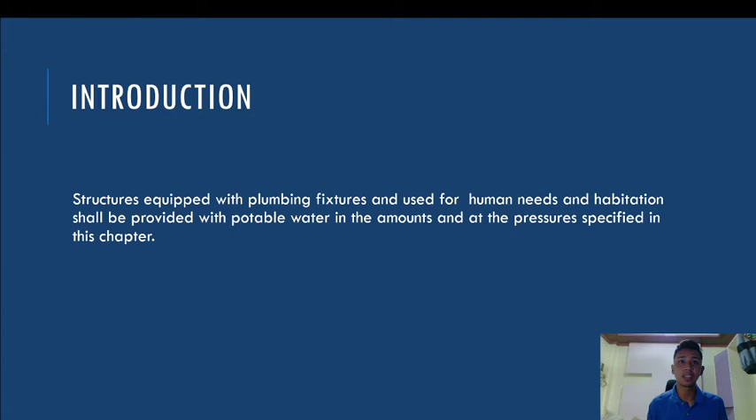Introduction: structures equipped with plumbing fixtures and used for human needs and habitation shall be provided with potable water in the amounts and at the pressures specified in this chapter. Section 601, running water required: only potable water shall be supplied to plumbing fixtures that provide water for drinking, bathing, or culinary purposes, or for the processing of food and medical products. Unless otherwise provided in this code, potable water shall be supplied to all plumbing fixtures.

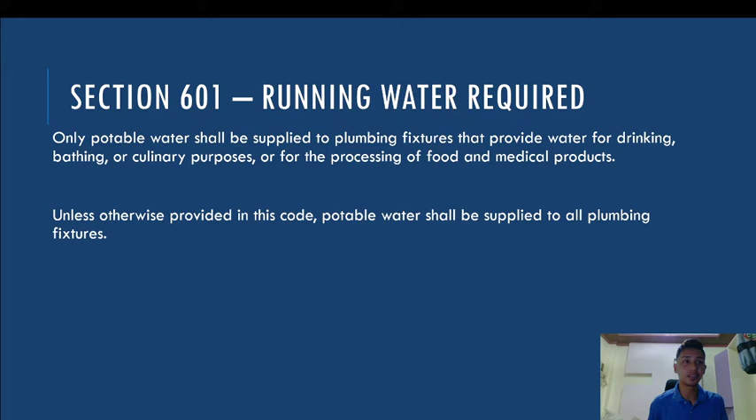Next is unlawful connections. No installation of potable water supply piping or part thereof shall be made in such a manner that it will be possible for used, unclean, polluted, or contaminated water, mixtures or substances to enter any portion of the piping system from any tank, receptacle, equipment, or plumbing fixture by reason of back siphonage, by suction, or by any other cause, either during normal use or operation thereof, or when any such tank, receptacle, equipment, or plumbing fixture is flooded or subjected to pressure in excess of the operating pressure in hot or cold water pipings.

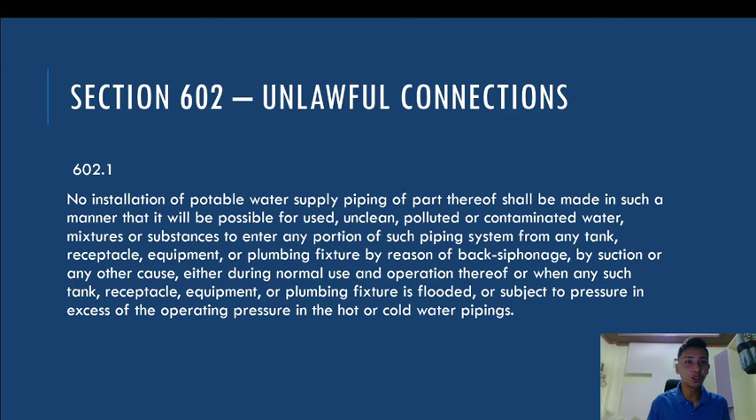Moving on, no person shall make a connection or allow one to exist between pipes or conduits carrying domestic water supply by any public or private water service system, and any pipe, conduit, or fixture containing or carrying water from any other source, or containing or carrying water which has been used for other purposes, or any piping carrying chemicals, liquids, gases, or any substances, unless there is provided an approved backflow prevention device.

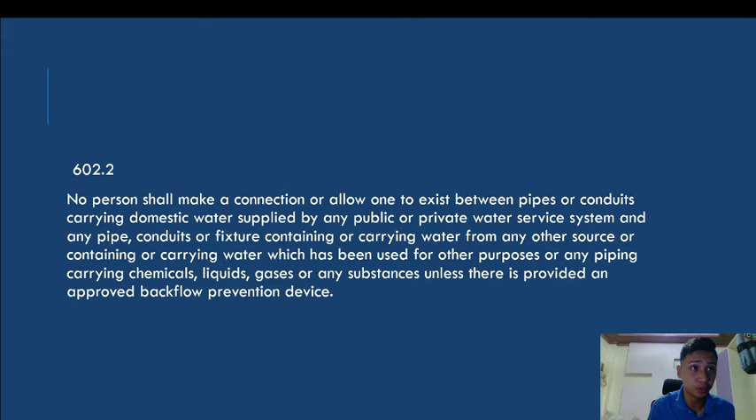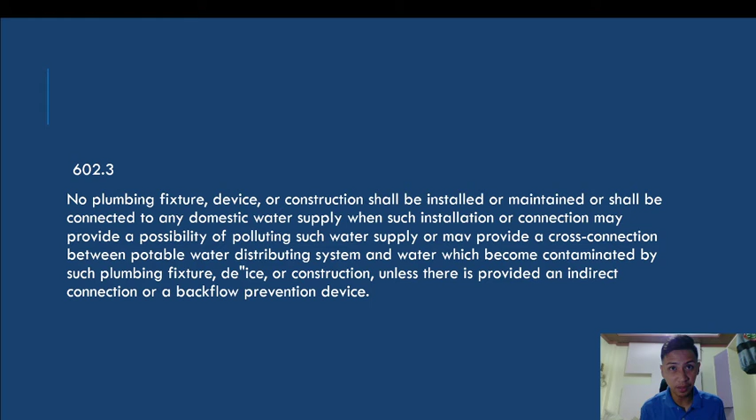No plumbing fixture, device, or construction shall be installed or maintained or shall be connected to any domestic water supply when such installation or connection may provide a possibility of polluting such water supply, or may provide a cross connection between a potable water distributing system and water which became contaminated by such plumbing fixtures, devices, or construction, unless there is provided an indirect connection or a backflow prevention device.

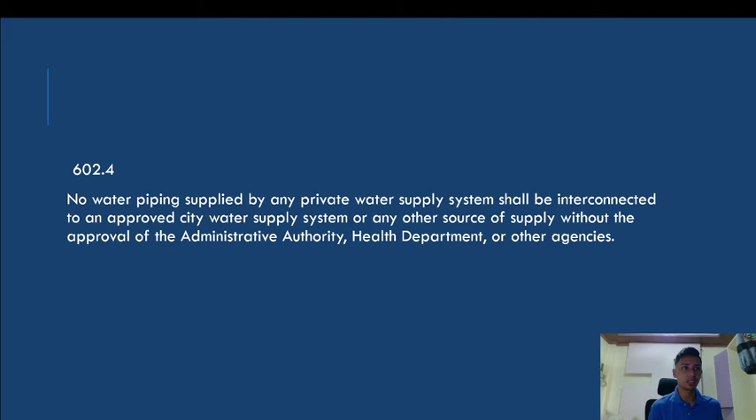No water piping supplied by any private water supply system shall be interconnected to an approved city water supply system or any other source of supply without the approval of the administrative authority, Department of Health, and other agencies. Once the city administrative authority, health department, or other agencies has approved, then you can connect water pipings with the city water supply system.

Cross connection control shall be provided in accordance with the provisions of this chapter. No person shall install any water-operated equipment or mechanism, or use any water treating chemicals or substances, if it is found that such equipment, mechanism, chemical, or substance may cause pollution or contamination of the domestic water supply. Such equipment or mechanism may be permitted only when equipped with an approved backflow prevention device assembly.

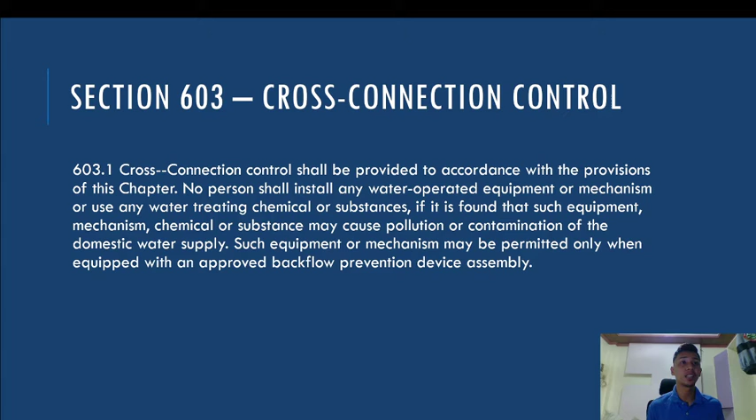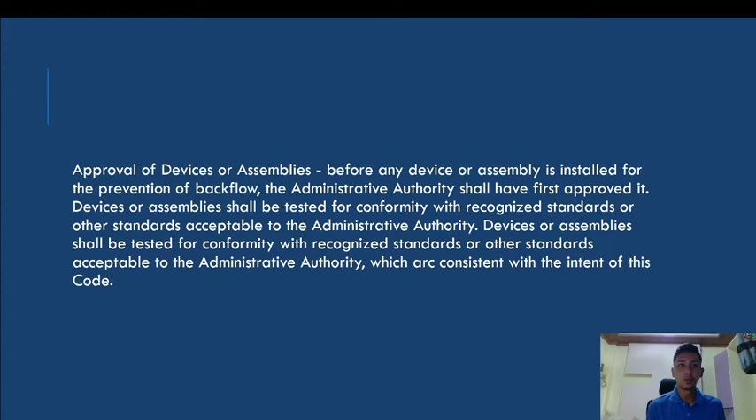Approval of devices or assemblies: before any device or assembly is installed for the prevention of backflow, the administrative authority shall first approve it. Devices or assemblies shall be tested for conformity with recognized standards or other standards acceptable to the administrative authority, which are consistent with the intent of this code.

The person or persons having control of such devices or assemblies shall maintain all devices and assemblies installed in a potable water supply system for protection against backflow in good working condition. Departments having jurisdiction may inspect such devices or assemblies, and if found to be defective or inoperative, replacement or repair will be required.

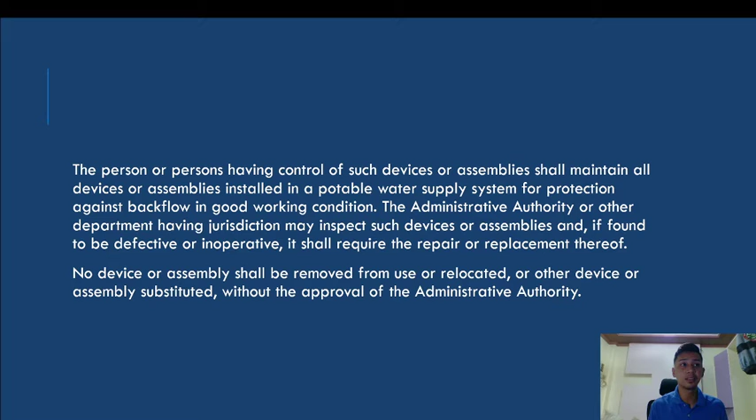No device or assembly shall be removed from use or relocated, or another device or assembly substituted, without the approval of the administrative authority. So no device shall be removed or relocated or replaced without approval.

Backflow prevention devices, assemblies, and methods. Air gap: the minimum air gap to provide backflow protection shall be in accordance with Table 6-1. This is the air gap, measured from the water surface up to the faucet's mouth.

The atmospheric vacuum breaker (AVB) consists of a body, a checking member, and an atmospheric opening. As you can see in the second picture, that is an atmospheric vacuum breaker.

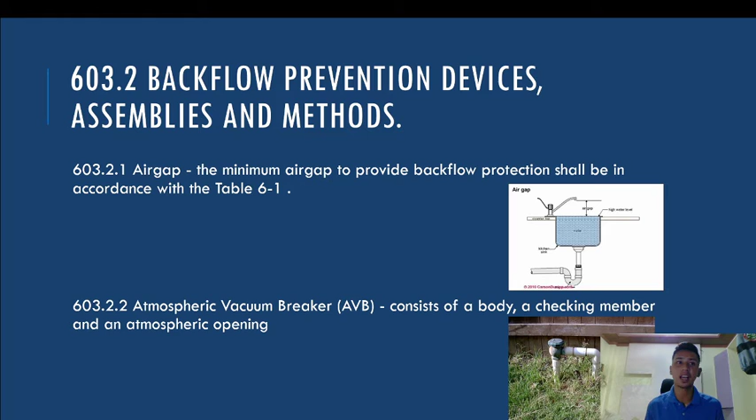Double check valve backflow prevention assembly (DC) consists of two independently acting internal or external loaded check valves, four properly located test cocks with connectors, and two isolation gate valves, as indicated in the picture.

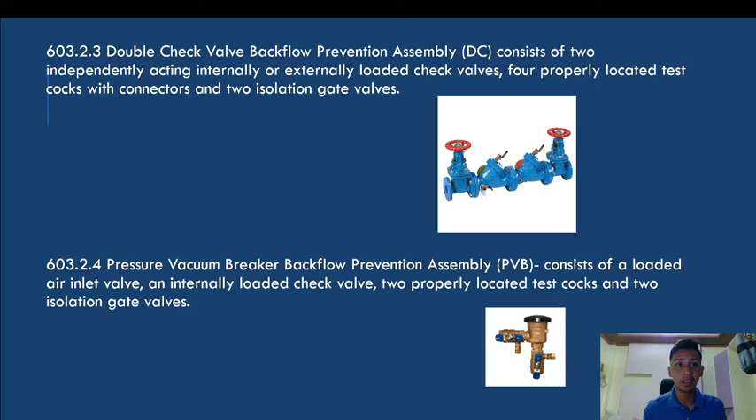Pressure vacuum breaker backflow prevention assembly (PVB) consists of a loaded air inlet valve, an internally loaded check valve, two properly located test cocks, and two isolation gate valves.

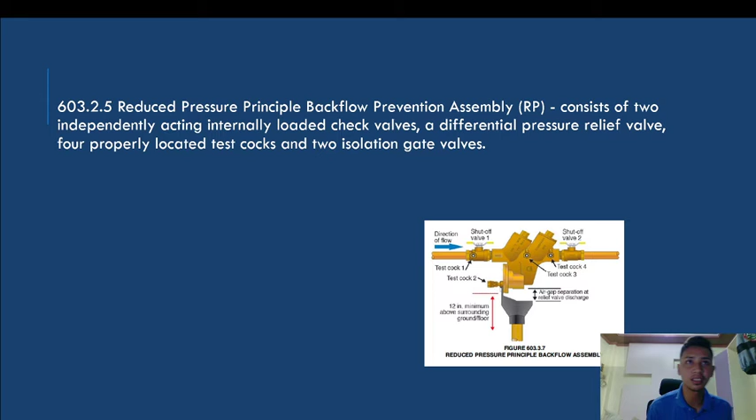Last is the reduced pressure principle backflow prevention assembly (RP). It consists of two independently acting internally loaded check valves, a differential pressure relief valve, four properly located test cocks, and two isolation gate valves. This is Table 6-1, minimum air gaps for water distribution.

For fixtures, when not affected by sidewalls, the air gap is two times the diameter of the effective opening. When affected by sidewalls, it is three times the diameter of the effective opening.

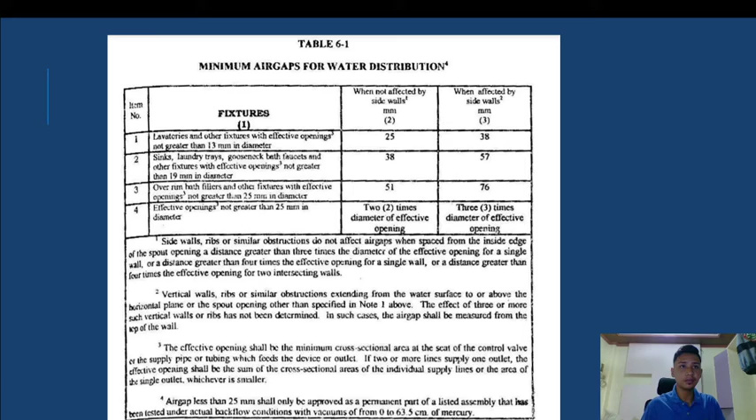So this covers the backflow assembly devices and methods. Next is the general requirements.

All assemblies shall conform to listed standards and be acceptable to the administrative authority having jurisdiction over the selection and installation of backflow prevention assemblies. The premises owner or responsible person shall have the backflow prevention assembly tested by a certified backflow assembly tester.

Testing shall occur at the time of installation, repair, relocation, and at least on an annual schedule thereafter, or more often when required by the administrative authority.

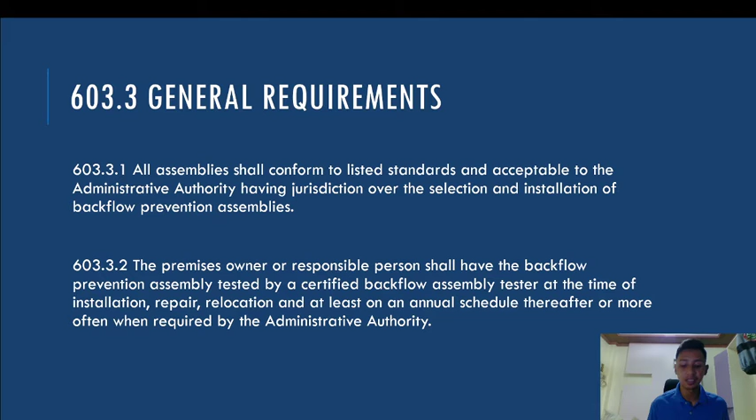Access and clearance shall be provided for the required testing, maintenance, and repair. This requires a minimum of 305 millimeters of space between the lowest portion of the assembly and the grade, floor, or platform. Installations elevated more than 1.52 meters above the floor or grade shall be provided with a permanent platform capable of supporting a tester or maintenance person.

Connections between potable water piping and sewer-connected wastes shall not exist under any condition, with or without backflow protection. Where potable water is discharged to the drainage system, it shall be by means of an approved air gap of two pipe diameters from the supply outlet to the top surface of the drainage inlet, but in no case shall the gap be less than 25 millimeters.

Connections may be made to the inlet side of the trap provided that an approved atmospheric vacuum breaker is installed not less than 152 mm above the flood level rim of such trapped fixture, so that at no time will any device be subjected to back pressure.

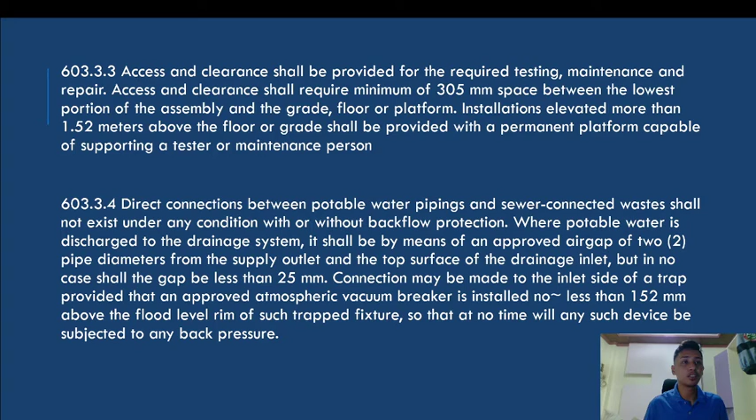Backflow prevention for hot water over 43.3 degrees Celsius shall be a listed type assembly designed to operate at a temperature of 43.3 degrees Celsius or higher without rendering any portion of the assembly inoperative.

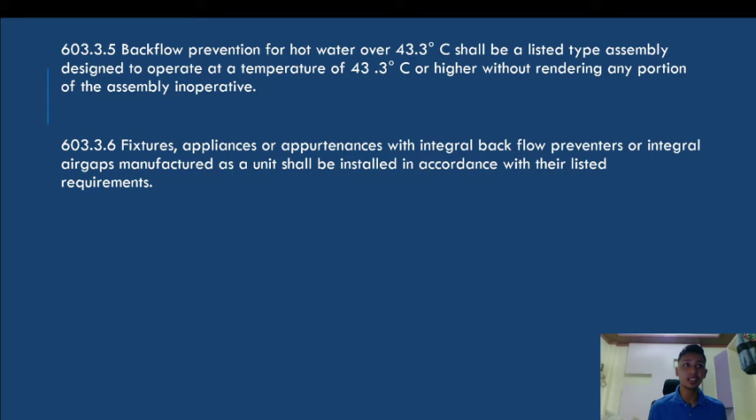Fixtures, appliances, and appurtenances with integral backflow preventers or integral air gaps manufactured as a unit shall be installed in accordance with their listed requirements.

Talking about specific requirements: water closet and urinal flushometer valves shall be equipped with a listed atmospheric vacuum breaker. The vacuum breaker shall be installed at the discharge side of the flushometer, with the critical level at least 152 mm, or the distance according to its listing, above the overflow rim of the water closet bowl or the highest part of the urinal.

Water closet and urinal tanks shall be equipped with a listed ballcock. The ballcock shall be installed with a critical level at least 25 mm above the full opening of the overflow pipe. In cases where the ballcock has no hush tube, the bottom of the water supply inlet shall be installed 25 mm above the full opening of the overflow pipe.

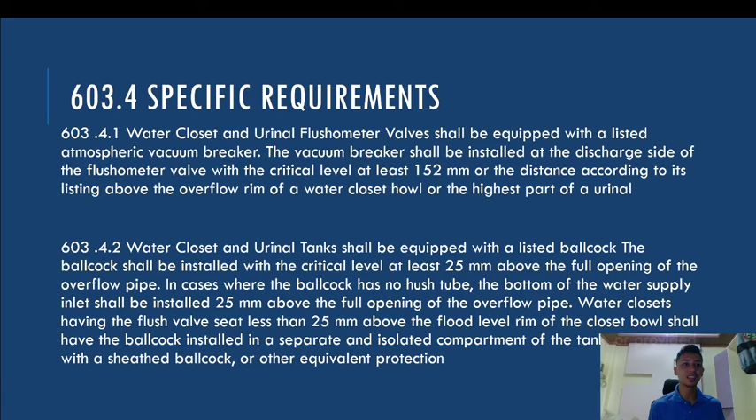Water closets having the flush valve seat less than 25 mm above the flood level rim of the closet bowl shall have the ballcock installed in a separate and isolated compartment of the tank, or provided with a sheathed ballcock or other equivalent protection. Water closet flushometer tanks shall be protected against backflow by an approved backflow prevention assembly, device, or method.

Heat exchangers and other assemblies or methods of construction using potable water shall be listed.

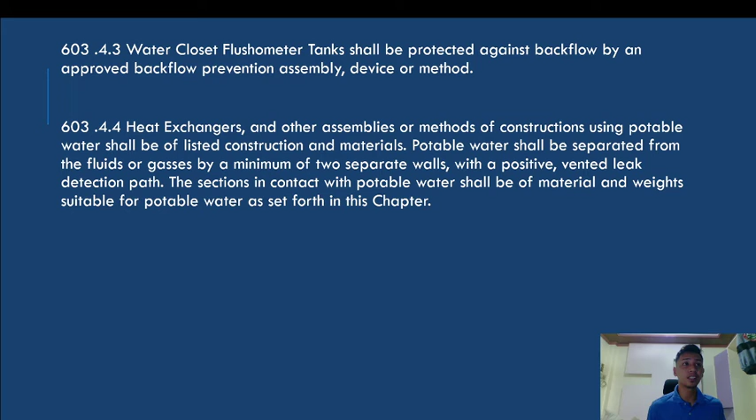Construction and materials: potable water shall be separated from the fluids or gases by a minimum of two separate walls with a positive vented leak detection path. The sections in contact with potable water, shall be of materials, weights, and design suitable for potable water as set forth in this chapter.

Inlets to tanks, vats, sumps, swimming pools, and other receptors, when protected by a listed atmospheric vacuum breaker, shall have such atmospheric vacuum breaker installed on the discharge side of the last valve, with a critical level of not less than 152 mm, or in accordance with its listing, above the flood level rim of such equipment and downstream piping. Water supply inlets not protected by atmospheric vacuum breakers shall be protected by an approved air gap.

Where atmospheric vacuum breakers or air gaps are not installed, other backflow preventers suitable against possible contamination or pollution may be installed in accordance with the requirements set forth in this chapter.

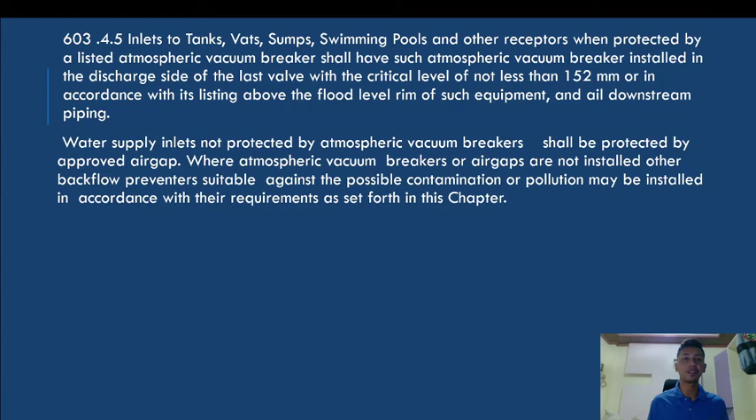Lawn sprinkling systems shall be equipped with listed atmospheric vacuum breakers installed on the discharge side of each last shut-off valve. Where atmospheric vacuum breakers cannot be installed because of the piping elevation of valves, other listed backflow preventers shall be installed in accordance with requirements.

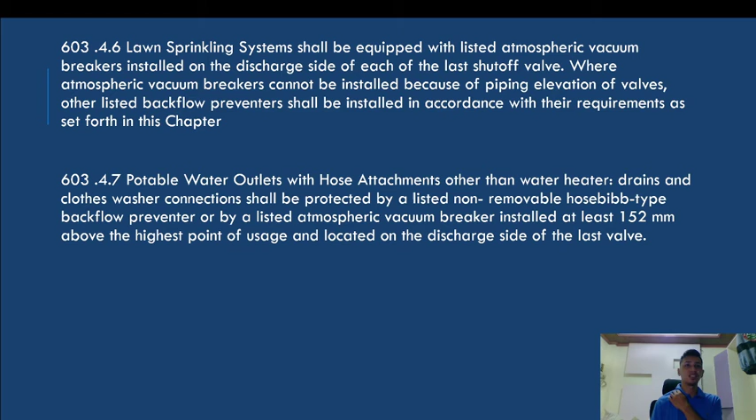Potable water outlets with hose attachments, other than water heaters, drains, and clothes washer connections, shall be protected with a listed non-removable hose bib type backflow preventer, or by a listed atmospheric vacuum breaker installed at least 152 mm above the highest point of usage and located on the discharge side of the last valve.

A listed backflow preventer installed in accordance with the requirements of this chapter shall protect water-cooled compressors, degreasers, or any other water-cooled equipment. Also note, some water-cooled equipment may produce back pressure and shall be equipped with approved protection.

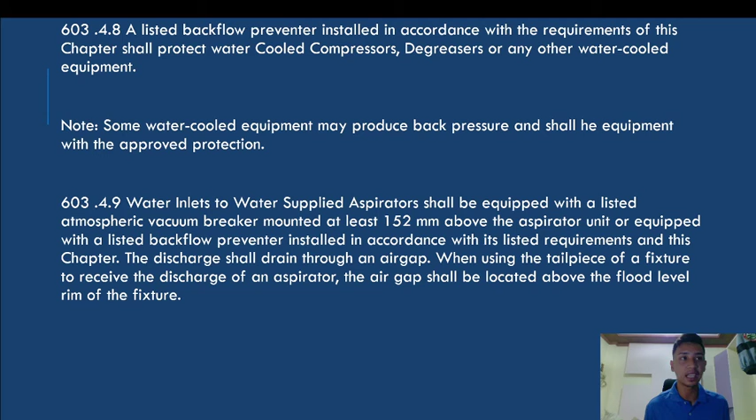Water inlets to water supplied aspirators shall be equipped with a listed atmospheric vacuum breaker mounted at least 152 mm above the aspirator unit, or equipped with a listed backflow preventer installed in accordance with its listed requirements in this chapter. Potable water makeup connections to steam or hot water boilers shall be provided with a listed backflow protection assembly.

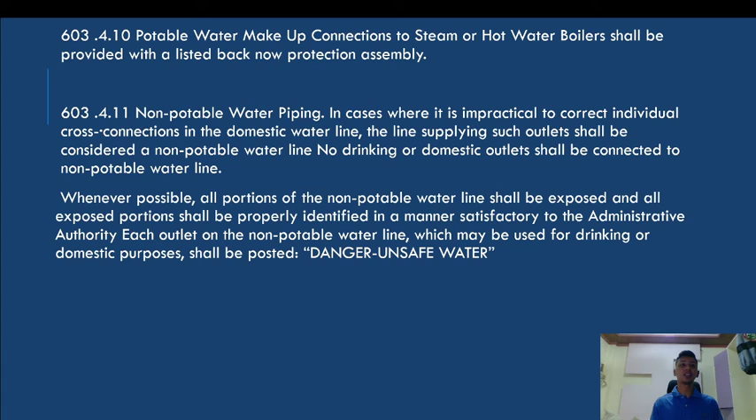Non-potable water piping: in cases where it is impractical to correct individual cross connections in the domestic water line, the line supplying such outlet shall be considered a non-potable water line. No drinking or domestic outlet shall be connected to non-potable water lines.

Potable water supply to carbonators shall be protected by backflow protection devices approved by the administrative authority and installed per the requirements of this chapter.

Backflow preventers shall not be located in any area containing fumes that are toxic, poisonous, or corrosive, as they may contaminate the water.

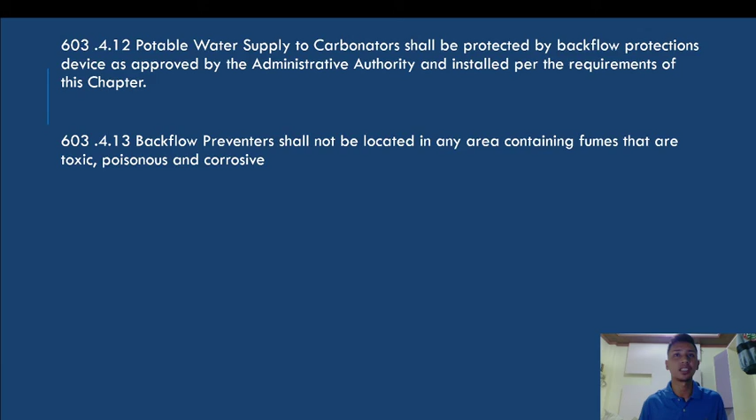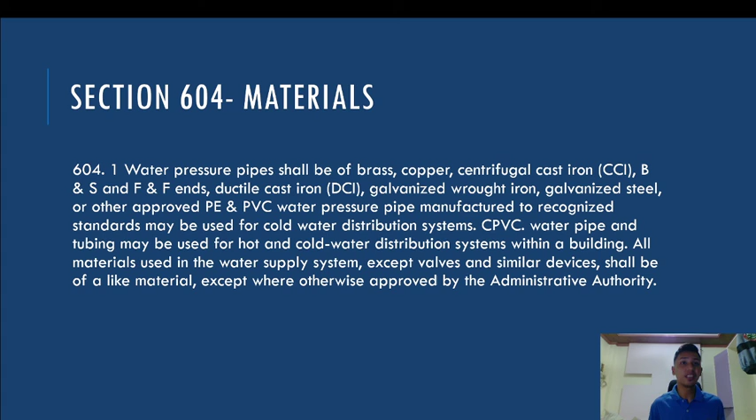Cast iron fittings up to and including 51 mm in size, when used in connection with potable water piping, shall be galvanized. All small size malleable iron water fittings shall be galvanized also.

Piping and tubing which were previously used for any purpose other than a potable water system shall not be used.

Approved plastic materials may be used in water service piping, provided that where metal water service piping is used for electrical grounding purposes and replacement, the piping therefore shall be of like materials.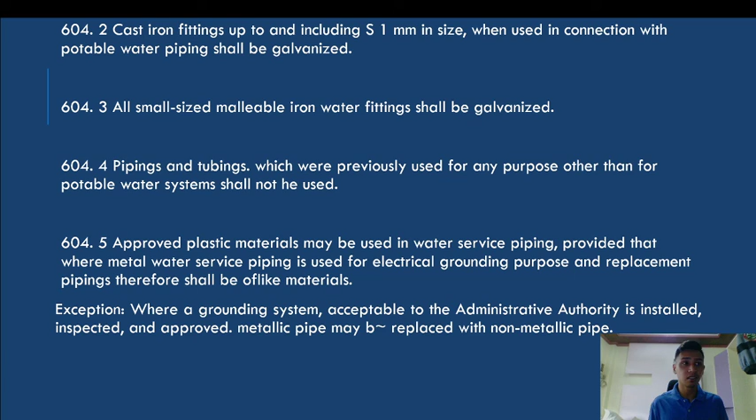Exception: where a grounding system acceptable to the administrative authority is installed, inspected, and approved, metallic pipe may be replaced with non-metallic pipe. Solder shall conform to the requirements subjected in 1302(4).

Lastly, water pipes and fittings with a lead content that exceeds 8% shall be prohibited and not used in potable water piping systems.